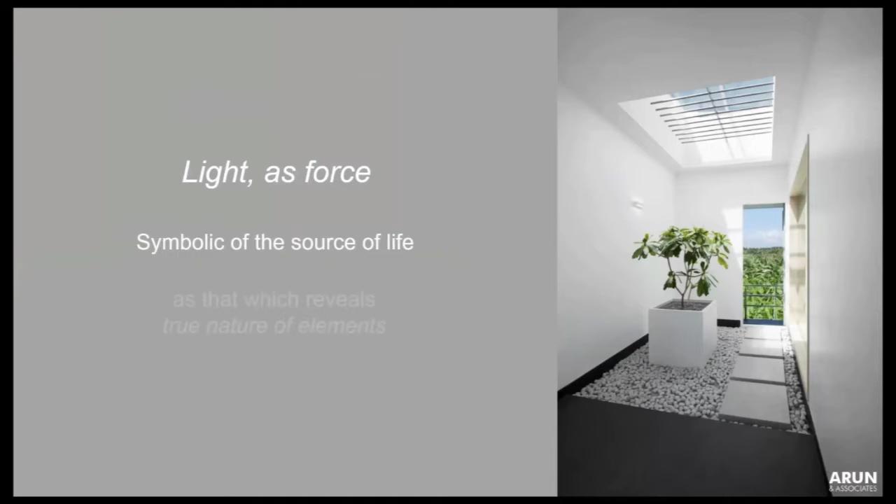I will show you 3 slides. The first is about natural light, second is about the elements in a home, and the third, the space. My architecture is about harnessing natural light in space. It's the interaction of light in space which enhances the functional elements like staircase, openings, etc.

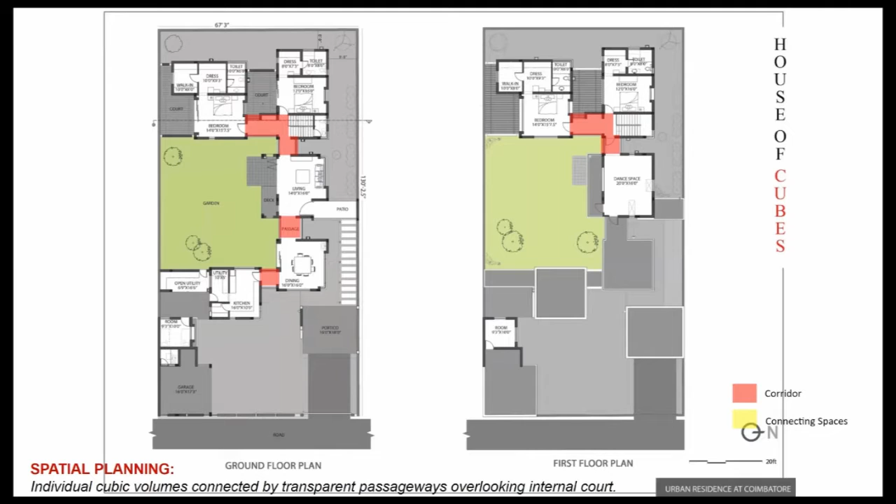I will take you through 4 projects of mine, mostly residential, to show how natural light is harnessed within the building. The first is House of Cubes. If you look at the plan, each function is a cube interconnected by a transparent corridor. You have kitchen, dining, living, and 2 bedrooms, all interconnected. The red patch shows the interconnection between spaces, and the yellow shows the connecting spaces, all overlooking an internal court. The section shows the interlocking of cubes through transparent corridors.

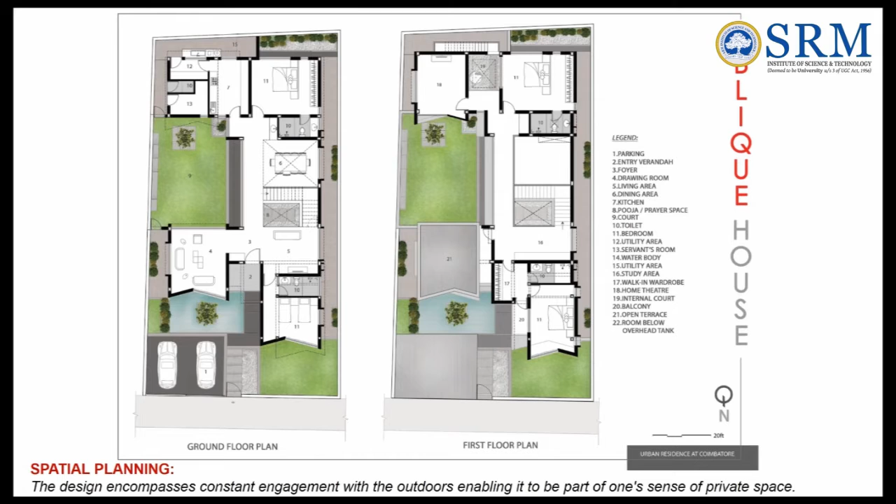The ground floor had 2 bedrooms and 2 living rooms and a dining overlooking the central court, and a puja again overlooking the central court, with also a skylit court. If you look at the sections, we have lots of openings from the ceiling to bring in natural light.

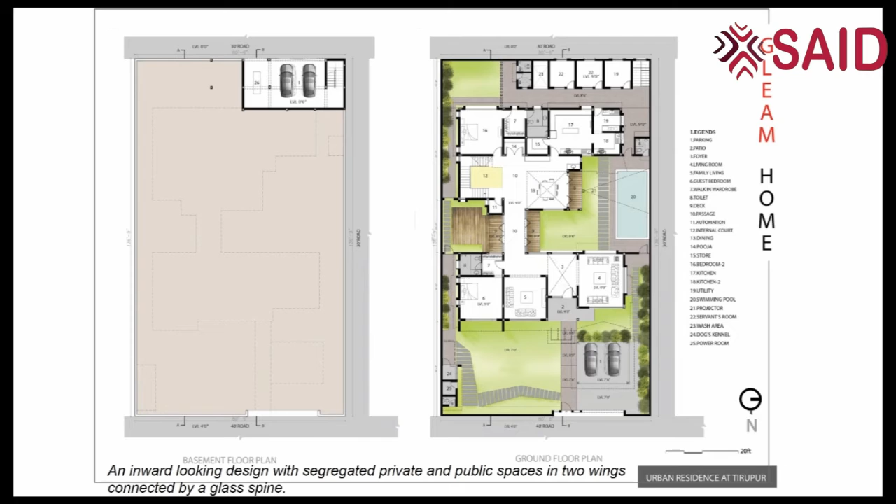If you look at the plot, it had roads on 3 sides, and there was a level difference of 6 feet from east to west. So we were able to tuck in a parking in the basement.

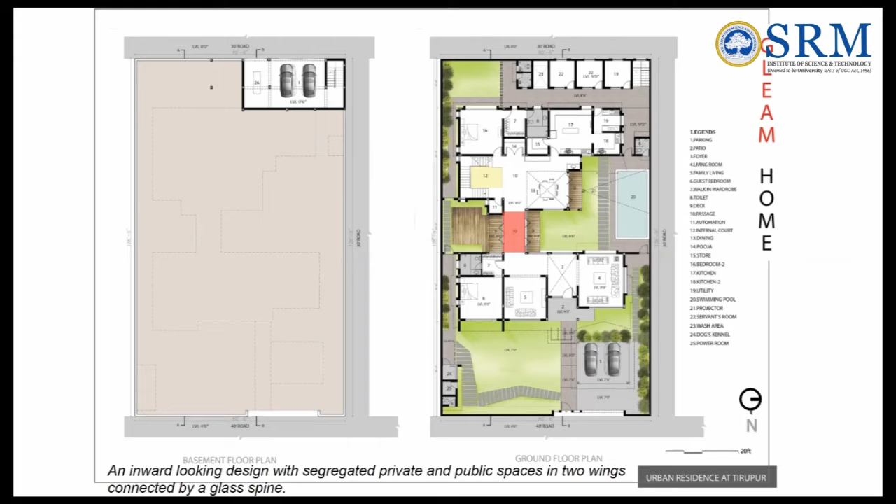The house has 2 wings connected by a transparent corridor. The yellow is the public space, which has the living room, the family room, and the guest bedroom.

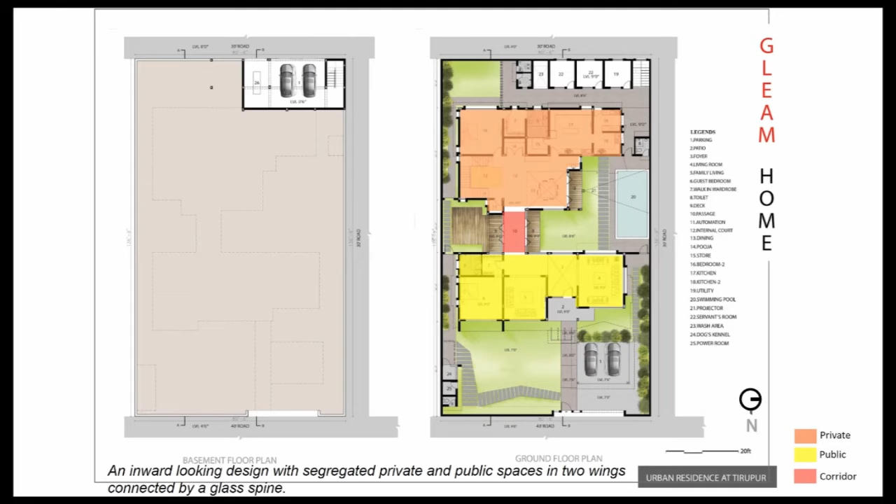The red is the transparent corridor. The orange is the private space, which has the kitchen, dining, and the master bedroom. The transparent corridor connects the swimming pool court to the dry court.

The first floor has 3 bedrooms and a home theater. And on the roof, we have lots of cutouts to bring in natural light within the building.

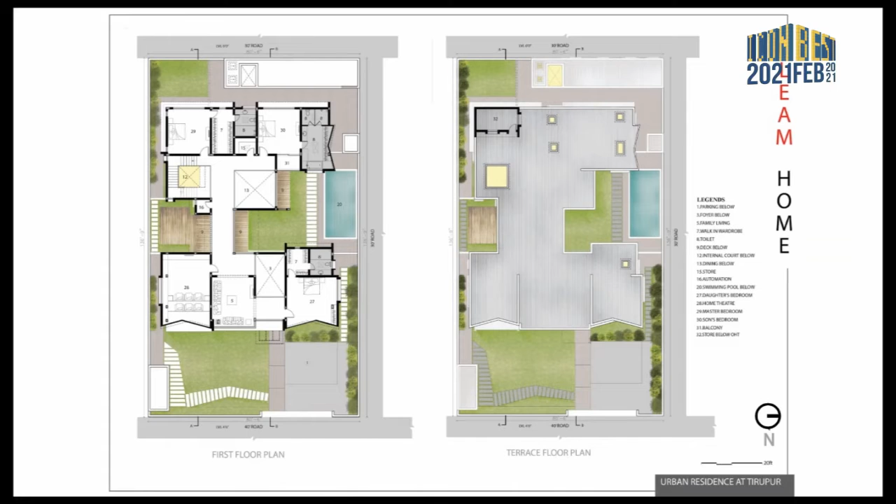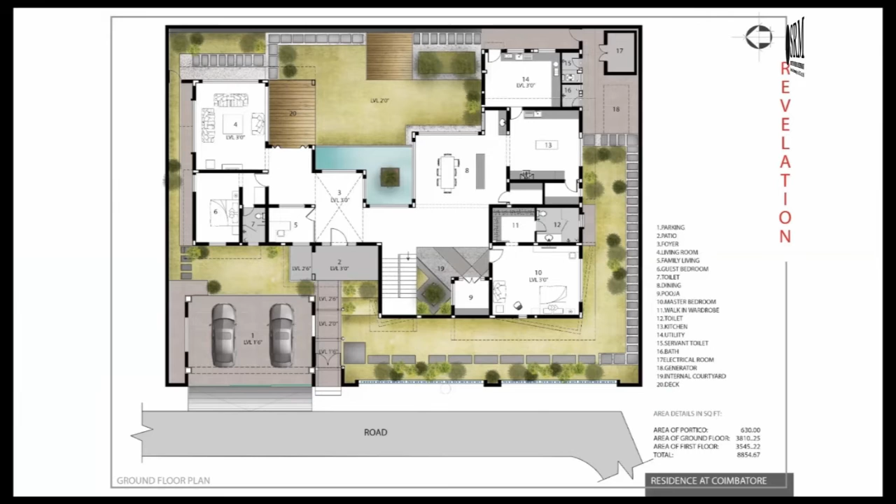It's completely transparent within the building. Even the first floor space is open towards the inner court, and it also has a double height entrance foyer.

So you enter into a double height foyer, which gives you a surprise about the internal court, which again has large openings and is very transparent.

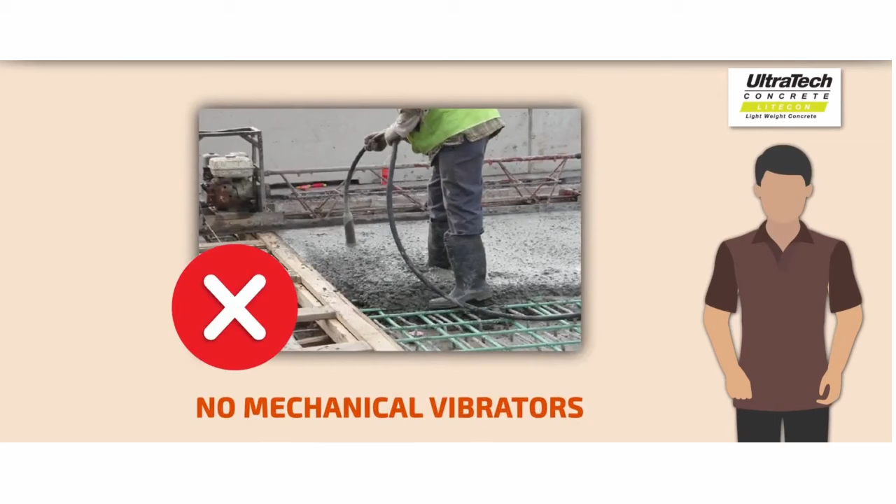Ultratech Litecon is a lightweight, smart filler concrete used as a filling and leveling material. It has been awarded Green Pro certification by the Green Products and Service Council. Benefits to the end customer: first, no mechanical vibrators are used, so it saves cost. Second, it provides excellent sound insulation, helping create spaces where sound from neighboring rooms does not create disturbance. Third, it is fire resistant and can reduce damage to structure in case of fire. Fourth, it provides long-lasting roofs as it is lightweight concrete. Fifth, it offers heat insulation, which can help reduce electricity bills by keeping the area cooler. Sixth, it can be used as a leveling course without adding dead weight, ensuring a good working surface.

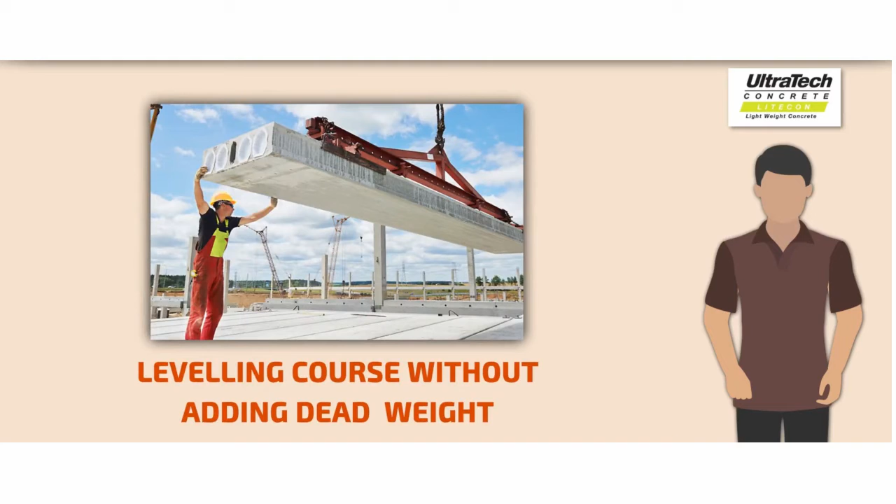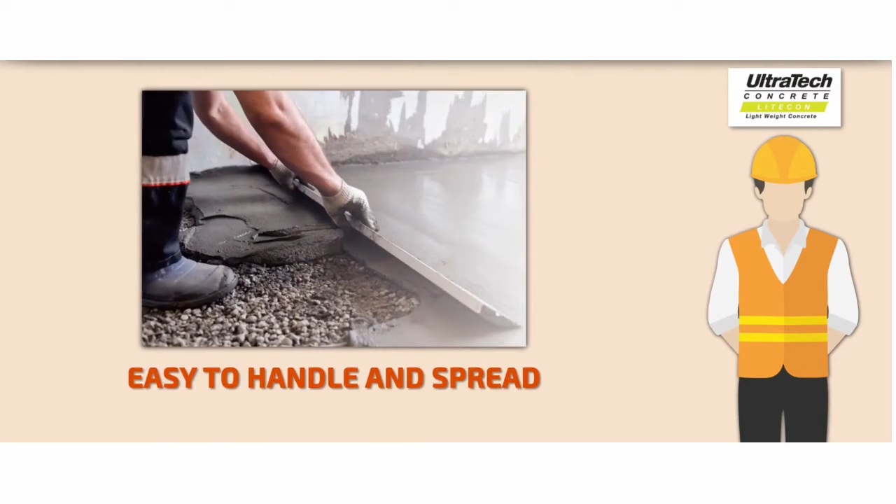Benefits to the applicator and technical influencer: first, Ultratech Litecon possesses excellent workability and can be placed in any desired shape, so applicators can use it in various shapes. Second, the application process is easier as it is easy to handle and spread. Third, this concrete has better fire resistance and excellent heat and sound insulation, giving the applicator talking points to charge a premium and be seen as an expert who can technically provide solutions to customer needs. Fourth, it allows easy handling at the time of placement. Fifth, it can be applied with all traditional surface finishes like paint, tiles, carpets, etc., making it easy for the applicator to use the product.

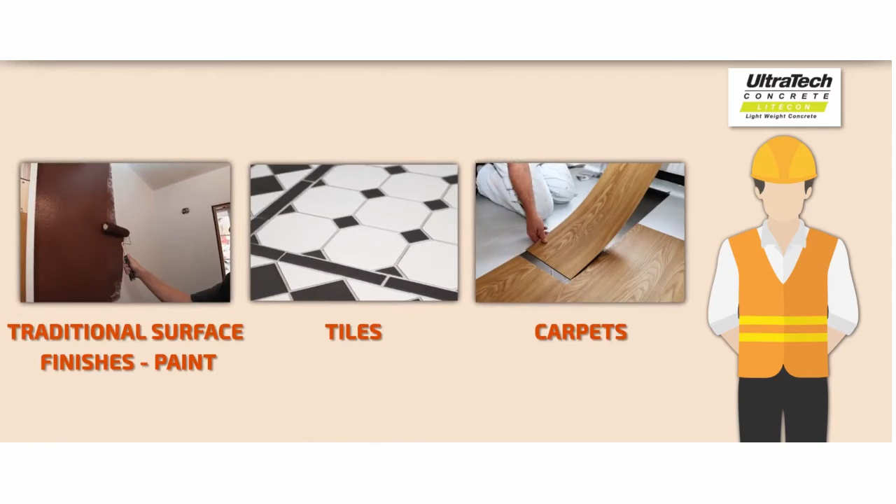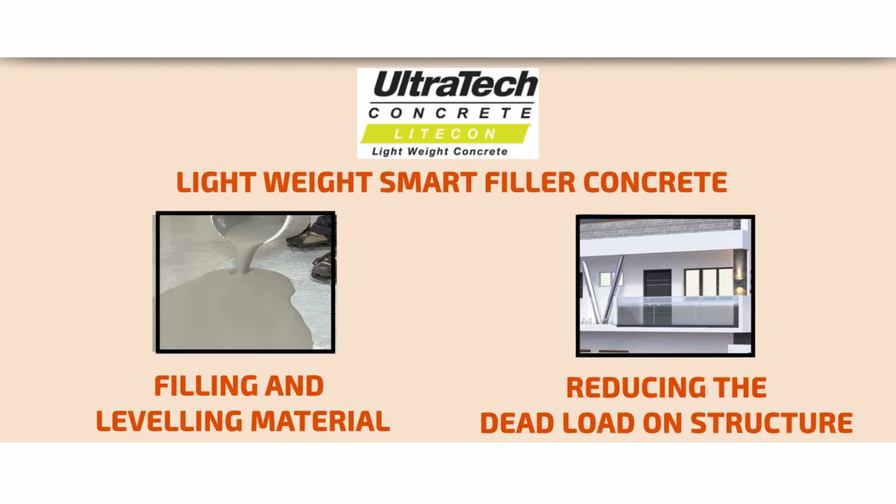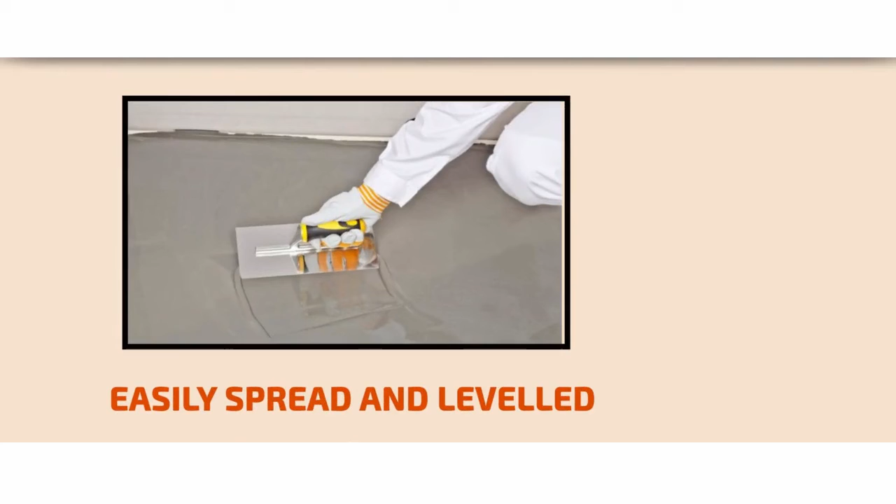Ultratech Litecon is a lightweight, smart filler concrete used as a filling and leveling material, reducing dead load on structure and providing ease of placement. Let's learn about its application process. It is a concrete with lower density foam concrete or thermocol beads. The concrete is delivered to site using transit mixers or buckets as per customer requirement. Since it is typically used as a filler material on roofs, proper planning is advisable to transport the concrete from the delivery point, from the transit mixer to the point of placement. Normally this is done manually, however in case of larger pour sizes, pumping may be performed. Litecon can be easily spread and leveled with the least amount of effort, and it hardens in about 24 to 36 hours so as to allow people to walk over it.

Ultratech Decor, concrete for durable aesthetic landscapes. Ultratech Decor is a patterned or imprinted concrete available in a variety of shades and patterns. Benefits to the end consumer: first, available in unlimited designs, textures, patterns and colors, giving the customer variety to choose from. Second, since the product is integrated with the concrete itself, its life is about 3 to 5 times longer than traditional solutions like pavers and tiles. Third, low maintenance cost as repeated repairs are not required. Fourth, it is manufactured using UV-resistant color hardener, which retains the true shades of color for long. Fifth, along with good appearance, the product gives skid and abrasion resistance, useful for high traffic areas or areas where kids, elders, and patients access frequently. Sixth, it enables faster, speedier construction.

Benefits to the applicator and technical influencer: first, it enables speedy construction, so applicators can finish faster and take on other projects. Second, it has low after-sales service needs as it is monolithic and does not allow grass to grow through gaps. Third, the contractor need not worry about performance as it is manufactured using UV-resistant color.

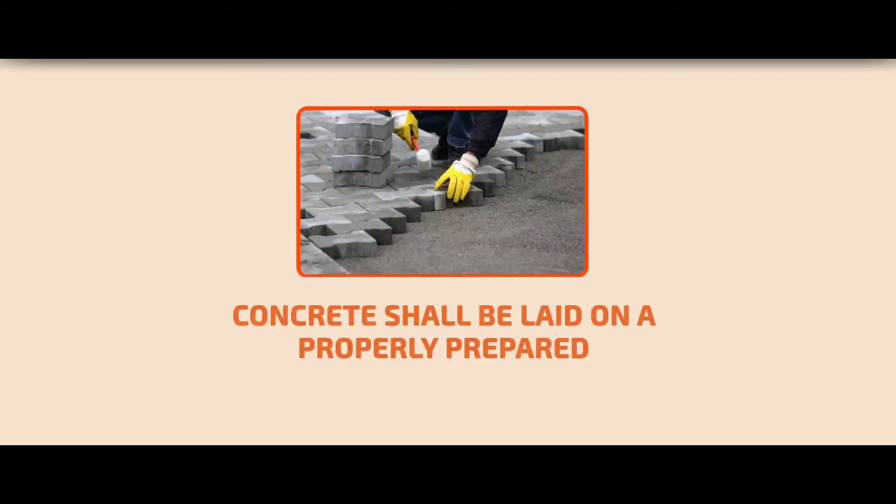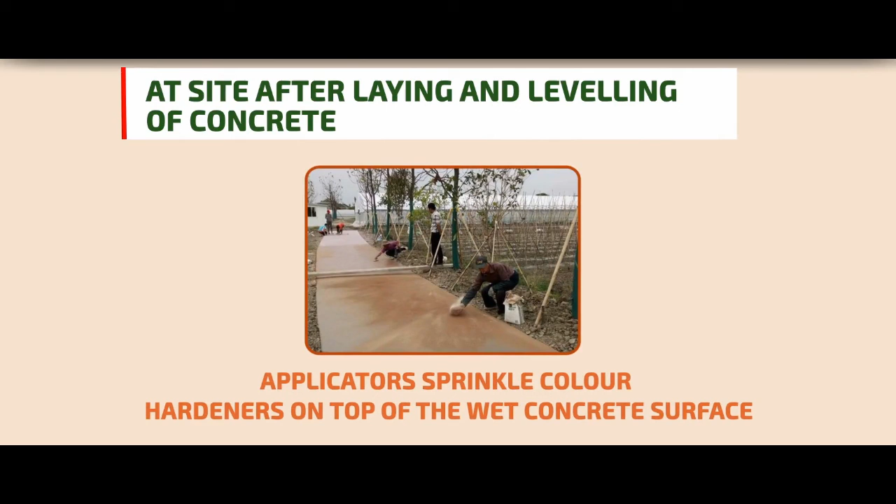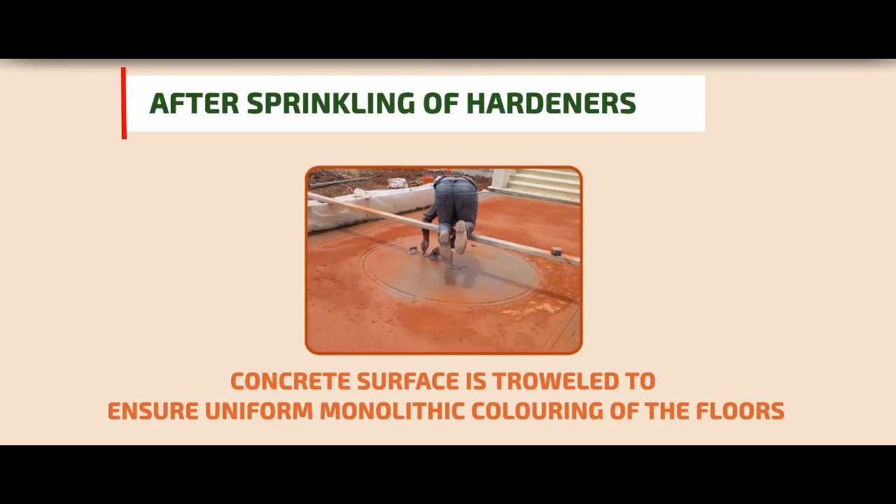Let's learn about its application process. The concrete shall be laid on a properly prepared non-porous surface. Ultratech Decor is delivered to sites in transit mixers of 5 to 6 cubic meter capacity. At site, after laying and leveling of concrete on the required floors, designated Ultratech applicators sprinkle color hardeners on top of the wet concrete surface. After sprinkling of hardeners, the concrete surface is troweled to ensure uniform monolithic coloring of the floors. Thereafter, the concrete surface is imprinted as per the selected design using stamping mats. After hardening of concrete, joint cutting is done. At appropriate intervals after hardening, joints are cut at designated distances, and sealing is done to ensure a crack-free and properly protected aesthetic Ultratech Decor.